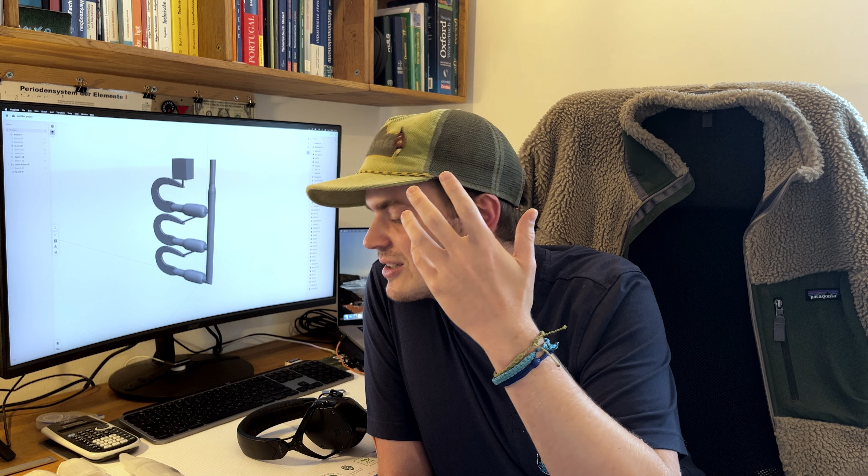It's got very easy functions that you can take into other 3D printing software to make your own molds and then print them straight away.

We're also going to be looking into the flow of the mold itself, because I noticed I made a bit of a mistake in today's video, but I'll go into that in next week's video once we've cast it and demolded it, since we're making a 2-colored trout grub, and I want to see how the flow is in the mold using 2 colors. I'll show you that in the upcoming video. So I'll head over into the 3D printing and modeling software now and show you guys how we made this.

I'll show you guys the mold beforehand, and also a finished version and a finished cast lure at the end of the video, because I'm already ahead of time and actually cast it already, and it's quite cool. There are still some things I have to change in the mold itself, but we'll go into detail on that in the future.

I'll also go into detail on why we're doing a 3D modeling video today instead of continuing with the 3D printed swim and glide bait, because I'm actually running into trouble. But I'll go into detail in the outro.

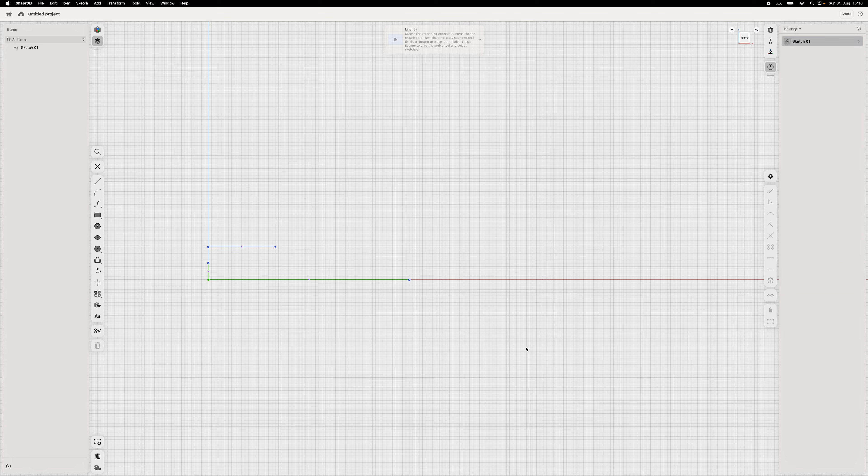So we'll draw this out, and we're going to be around 60 millimeters, and we'll also be around 5 millimeters because we're going to revolve the actual drawing. So we know we'll stick around 5 with the height, and we'll see that at about 20 millimeters the hook actually comes out. These lines just help you orientate on how big the drawing should actually be.

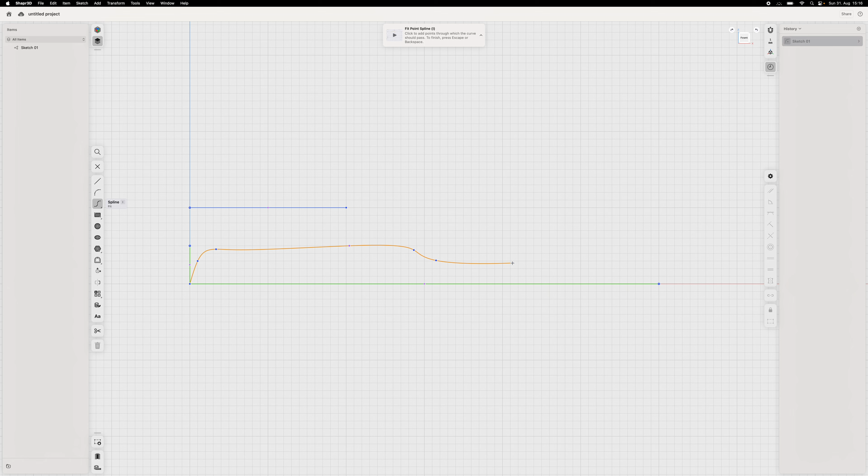The first thing we're going to do is start with a spline drawing, and we'll go along about to here. Then we'll draw in our sketch, go down and just place it about here. Now we can actually take these points and place them a little bit in a way we would like.

So I'm going to delete this one. We'll drag this one out and round it. Then we can take it back a little bit like that, and we'll also drag this one back a bit, so we make a little tail.

A bit further back around here, and we'll place it like that, and we'll also not round it as much so that we've got a bit of a decrease of the volume towards the tail.

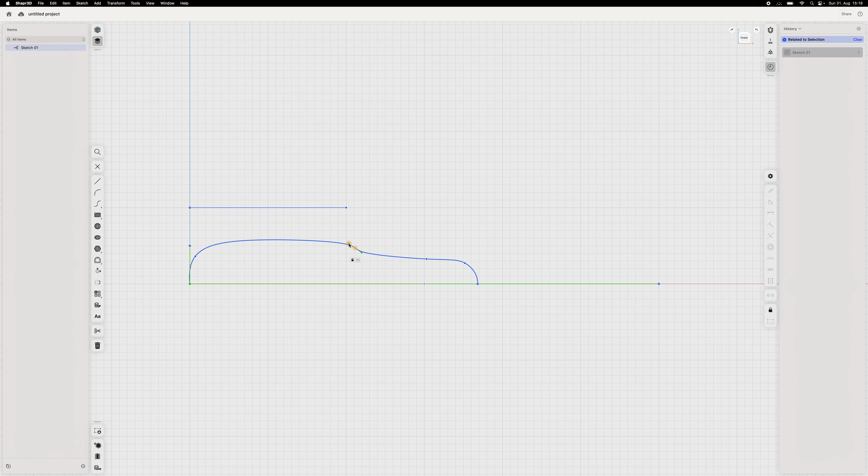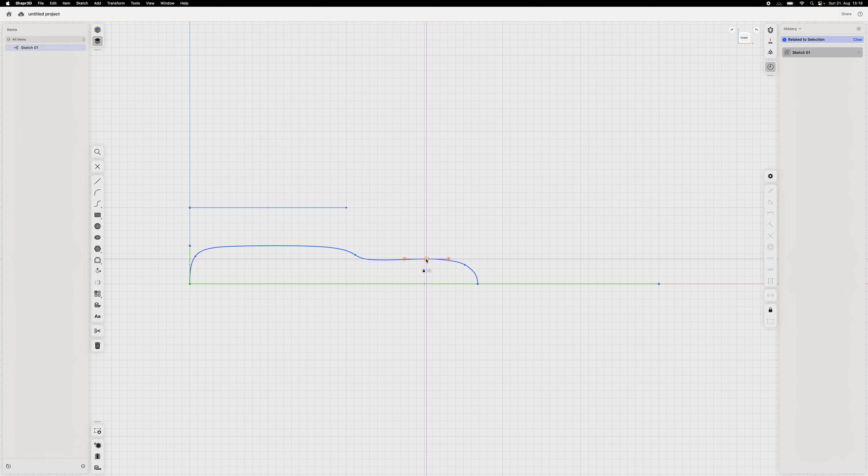So I'll actually delete this point still, and this one we'll go ahead and drag out like that and also pull it down, and then we can also drag this one down. Now we see where we are with the height of the lure, or of the soft plastic, and we can go ahead and drag these a bit further down, and then this should be pretty much ready for creating our first part.

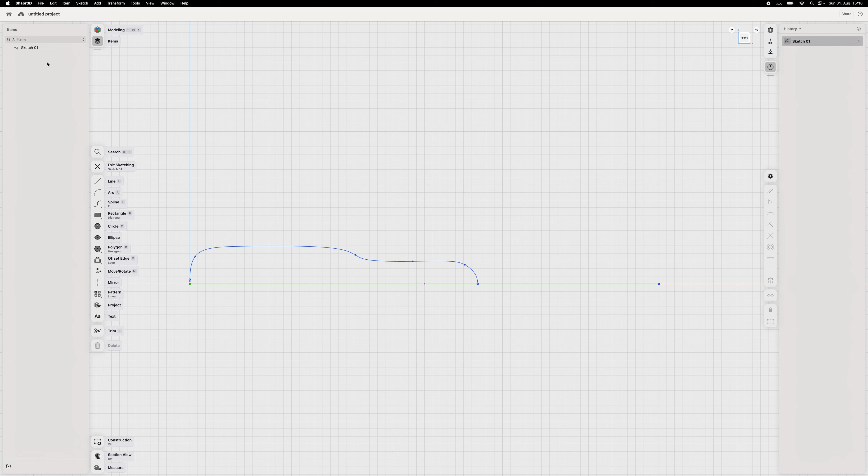So now we will go ahead, staying in that sketch, and we'll trim away our helping lines since we won't be using those two anymore. Let's just check this point is still centered - yes.

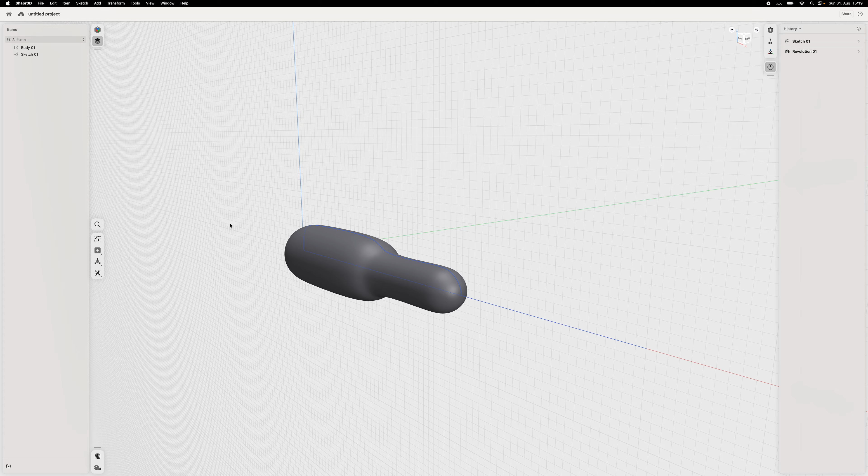Now we go out, choose this sketch and revolve it around this axis. That is going to be the first body part of our lure. We see that that is actually looking quite nice.

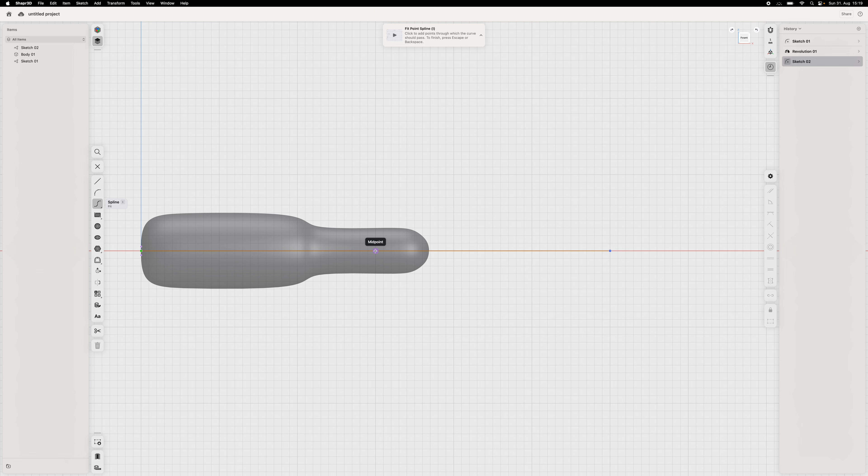Now we can go back and make a new sketch in the same plane we were in before. We'll again add a helping line just to know how long our tail will actually be, sticking with our 60 that we were planning, and we can now use our spline function with the midpoint.

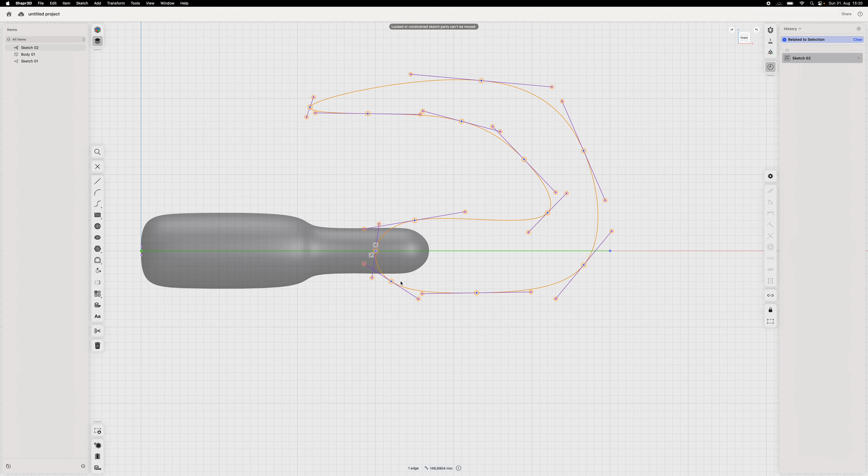We'll draw out a nice little curve, come back right here, and end up right there. Now we can drag these points again towards where we want them to be. I'll make these two quite symmetrical so we have a nice tail right there, then drag this back in a bit and start forming things.

We're trying to make what we think would look good and work well - a little broader right here, but I'm actually quite happy with that. We'll now broaden the top and maybe push it back a little bit, just like that. Once this is done, I think I am quite happy with how that looks now.

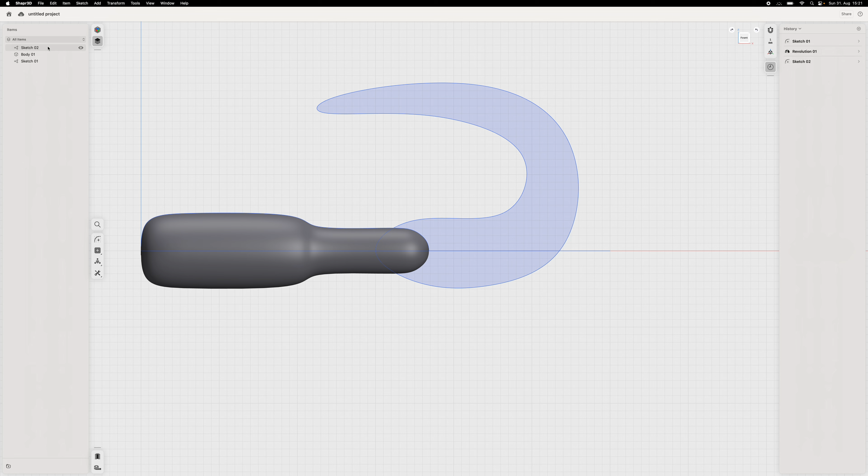So you can go out and see there's these two halves, which you don't want. We'll go back in the sketch, see this is where our 60 is actually, so maybe we'll still go back a bit and drag out the tail a bit, because it doesn't matter too much.

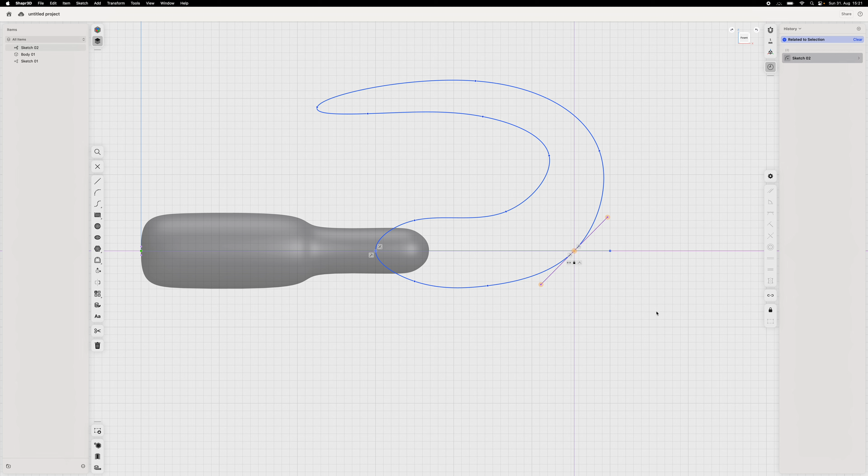We just want it to be nice and floppy, so we'll drag him out about like that. Then we can also minimize the height, because I'm limited with my printer to the size of the mold I can print, since I'm using the A1 mini, so you always have to keep that in mind a little bit. Now I'm quite happy with that.

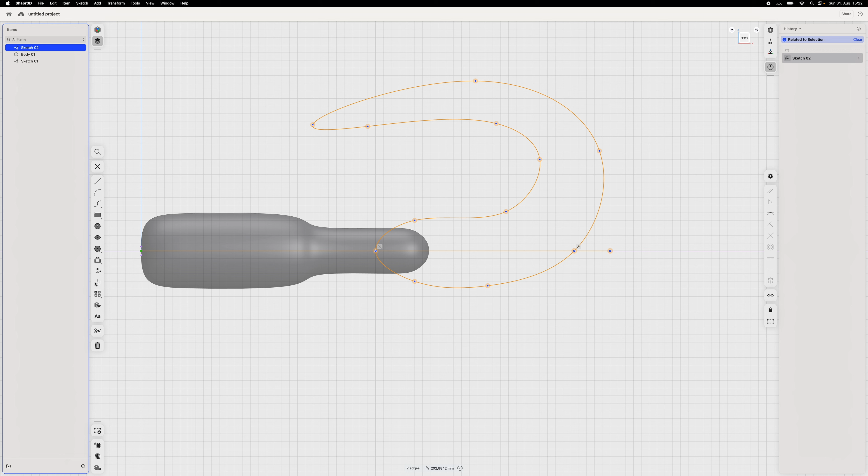We will go out, and as I said, these two we are going to look at now. So we'll go into our sketch, and we forgot to trim away our helping line. Once you trim away our helping line, you can go out and you see it will be the entire body.

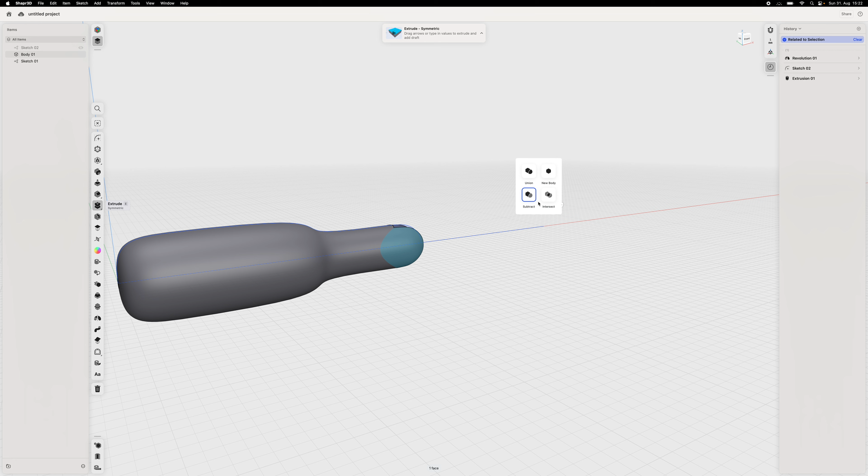Now we can choose the symmetrical extrusion setting, and we will pull him out to 1 millimeter, so our tail will be 2 millimeters thick. We'll say we'd like to have it in union with the body. Now we have got our finished tail for our trout grub, and we can go ahead and add a fillet to round off the corners a little bit.

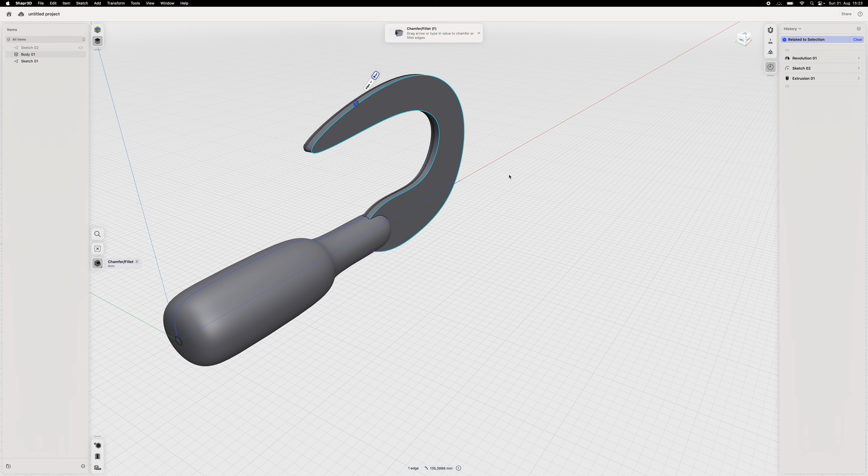It often gives you a little bit of trouble trying to do that. As we see here, we can go to 0.8, and here we are having trouble, so we will try and find a value. This is always different - I don't know exactly what it hangs together with, but we will just choose one that works because it isn't too important.

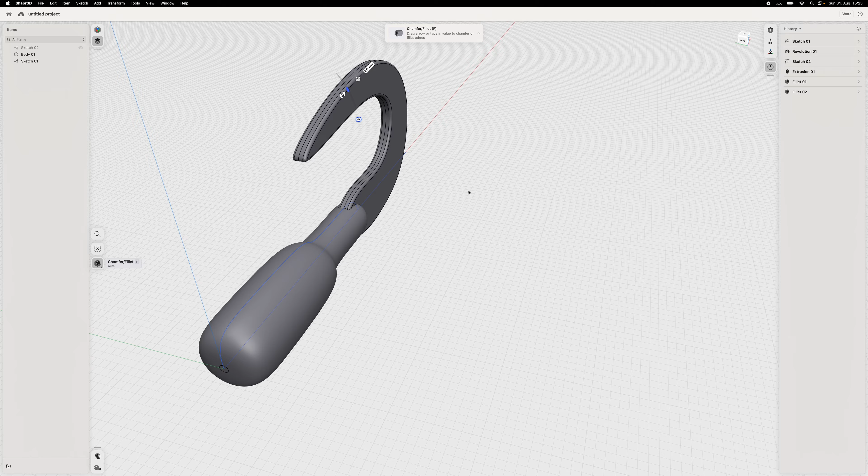It will help us if we have the same on both sides, so we'll go with 0.4 for this one, and here as well. You won't really see this once you do the 3D print because it is really so small - it just helps with the casting.

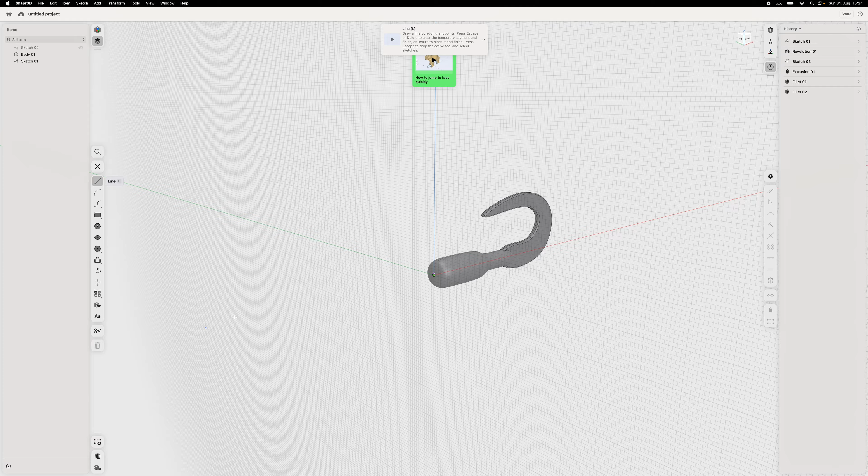So now we have got our bait, which is cool - that is pretty much done. The next thing we're going to be doing is start a new sketch right about here, because we can straight away plan where we will be casting into.

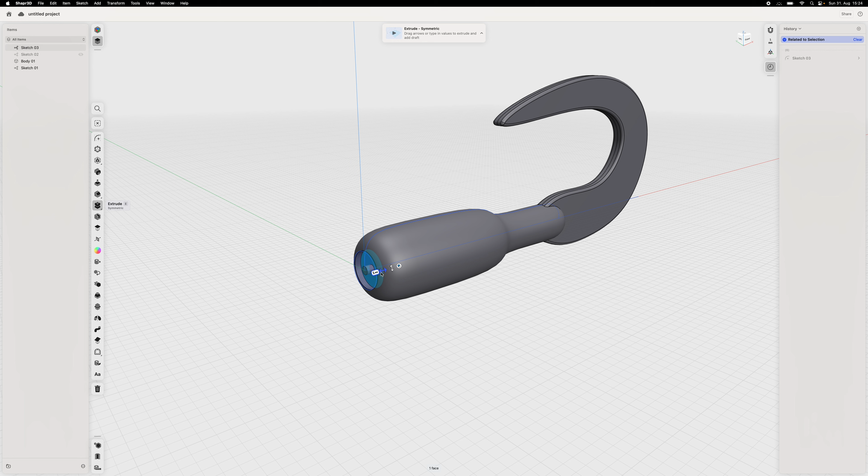So we will make a 5mm inlet for our extrude symmetrically, and we see that that is actually not ideal.

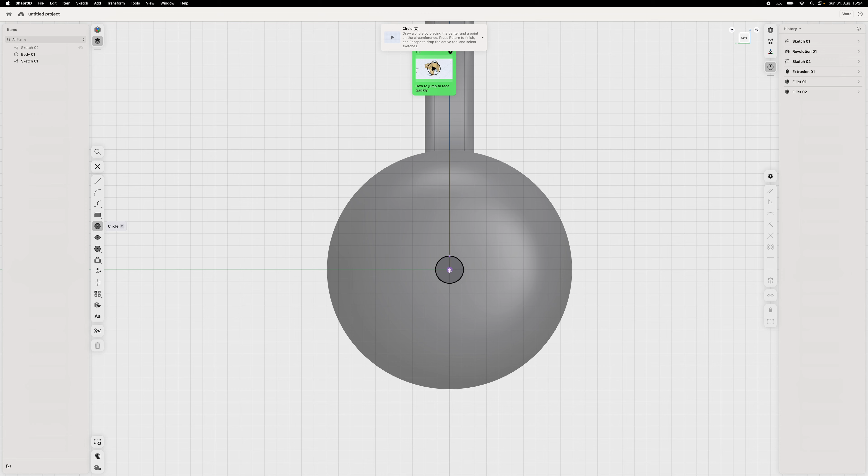So we will actually choose this for our sketching. That is when there is a little bit standing further out than the plane itself, and then you should just choose the side that you have. Through making a symmetric extrusion, we will anyway be looking at the entire surface.

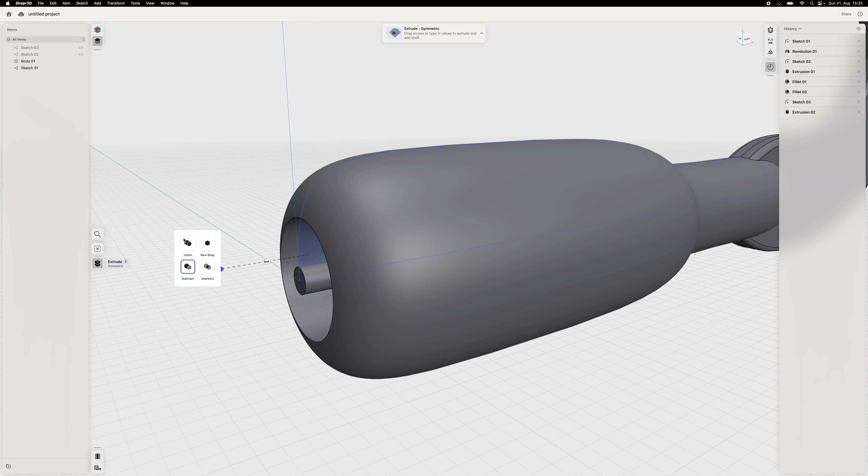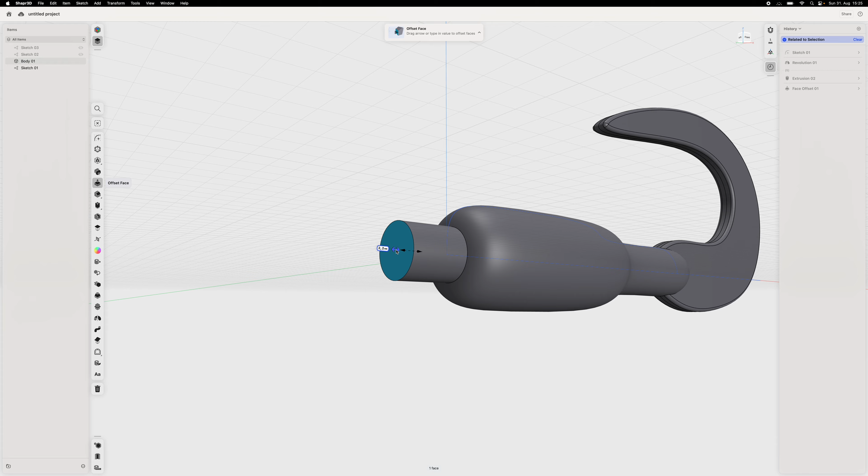It still is the same, but we'll do a different trick. So we will do about 3mm, because we are going to try and keep it as close together as possible. Now we will still choose union, and that's going to be done. Now we will still go ahead and pull out this till it meets up with the surface here. So now we have got the surface. We'll still pull it out maybe another millimeter, or actually 2, just like that. Then we have got a nice channel where we can extrude a casting channel into, but I'll show that in the next step.

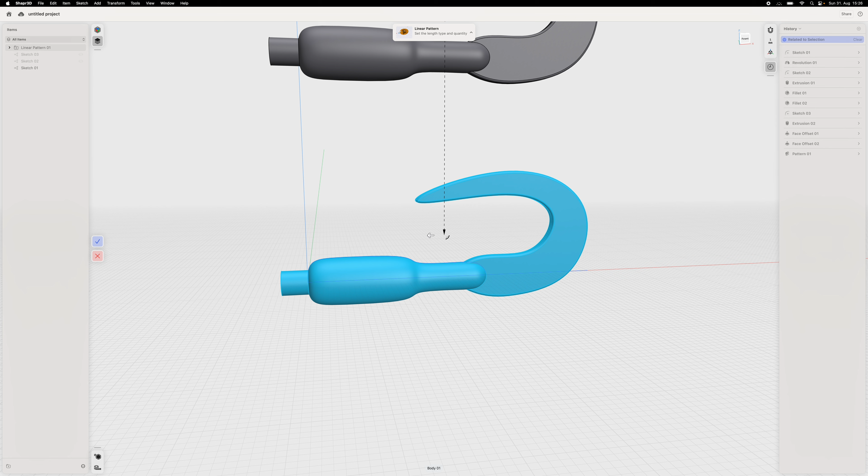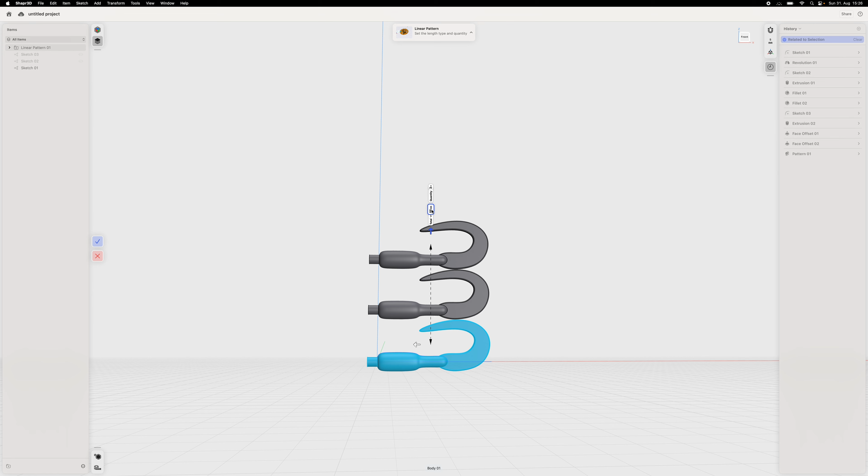Now we will go ahead and choose our body, and we would like to make a pattern in this direction, and we'll see how far apart we have to go. So we can now say 70. Okay, it's still possible to go a bit nearer together. We'll go 60. 60 is quite close. We'll see if we can do 55 without them touching. So no, that doesn't go. So we'll do 57. And that is gonna be what we are gonna work with now in the next stage.

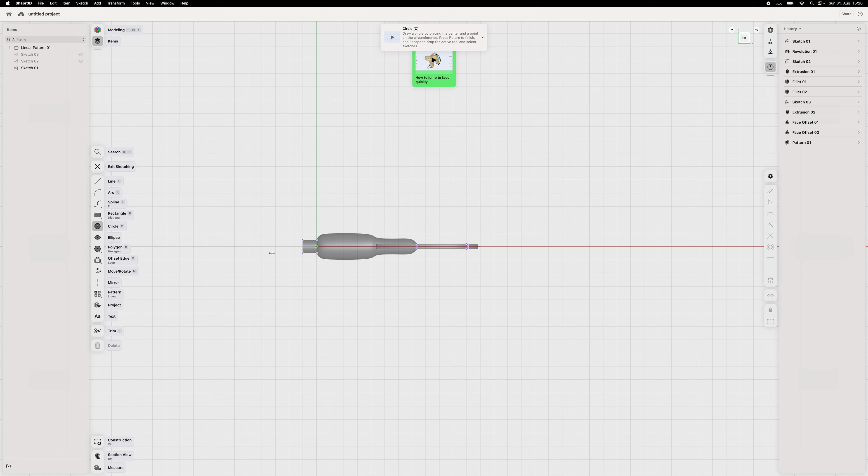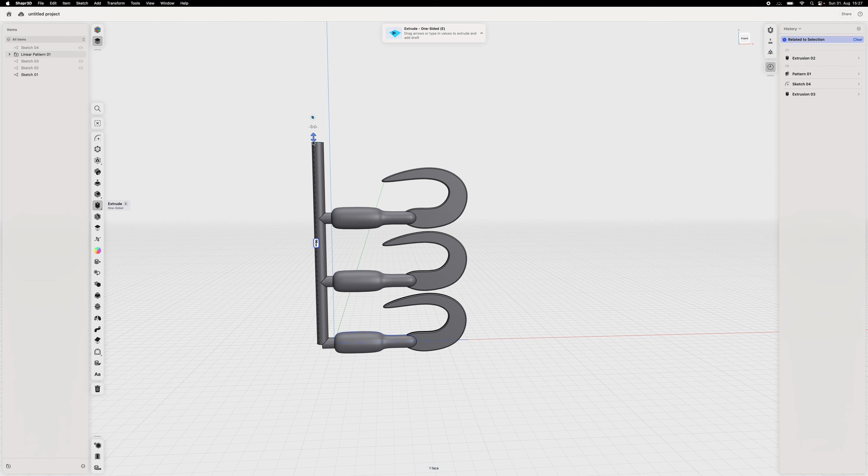So now we have pretty much got our casting channel right here, and we will go into this plane and draw a circle with 5mm right there, which we can extrude up. We will again choose union, and we will try and see that we are about, let's say, I think 90 will be okay for that. So now we will make sure that we also extrude it down. Just like that. And we have got our casting channel where we can place our injection and press in the silicone mix that we will be using for casting.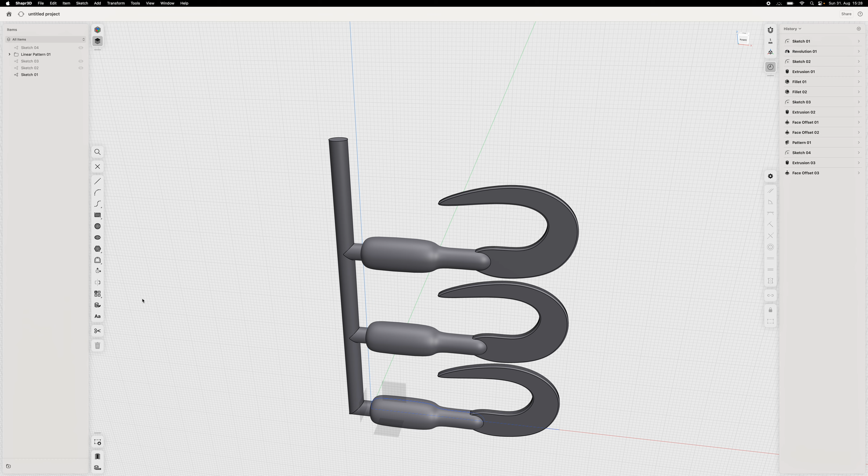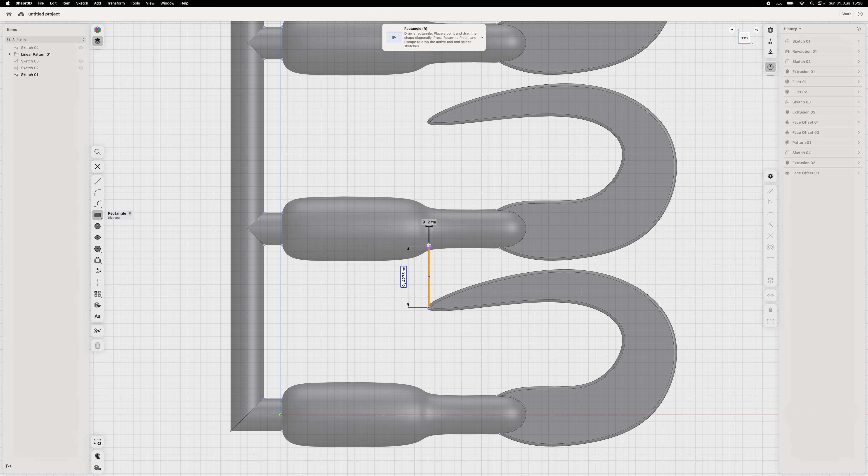Now we will still have to look and find out how we can create an air outlet for any air that is in our mold when we are casting it. So that's the next thing we are going to look at, and we will do that in this plane. So that is exactly in the middle of our mold itself, and we will now draw very easy air outlets right at the tip here, and we will go up to our top body and connect that. We will do exactly the same right here.

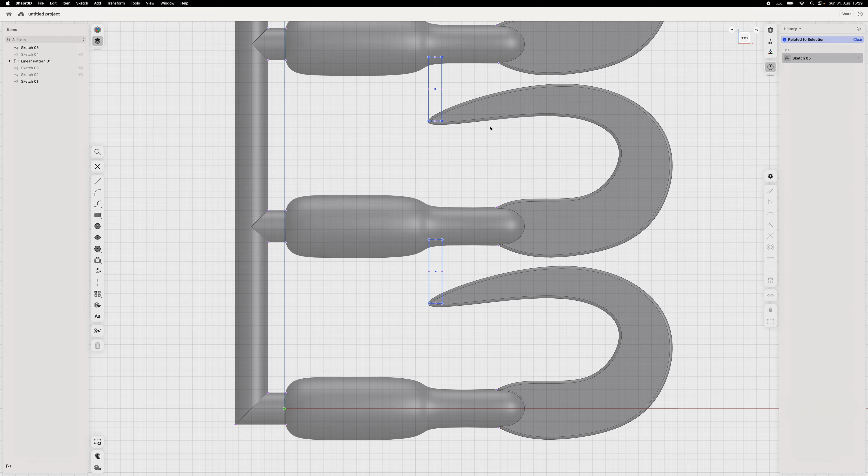We will make them about the same size. So that is going to be those vents. That means that when the material runs in here, the air gets pushed out.

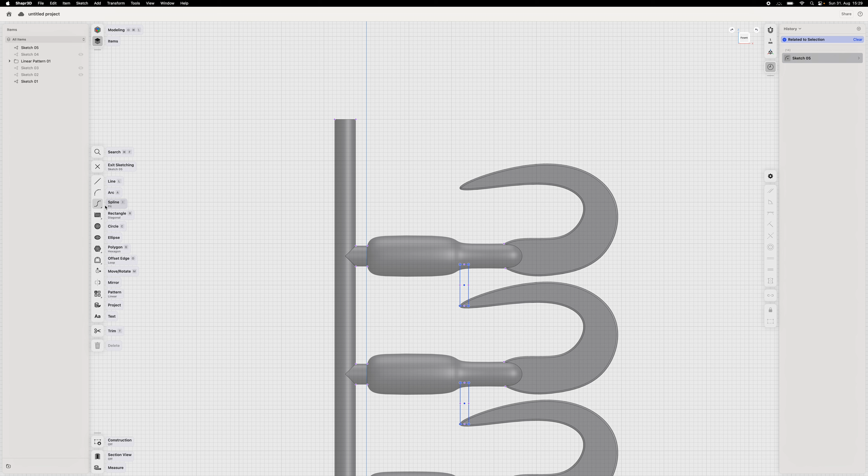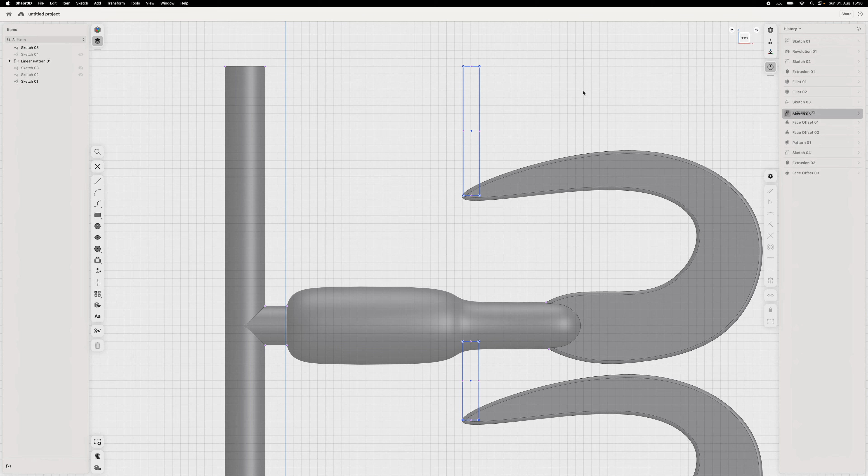We'll see if it's going to be a problem with the bottom one. We'll be casting very slowly, so I'm actually hoping that the bottom form fills first, and we push out the air through this tail out into the second one, and then fill up the second one, push out the air through into the third one, and then we will make one air chamber still at the top here that we will place exactly the same as the other ones right about here, and we will then go up to where we started. So we will also make it 2 millimeters, and we will place it right here, and we will heighten this to here. So that's going to be our air outlet.

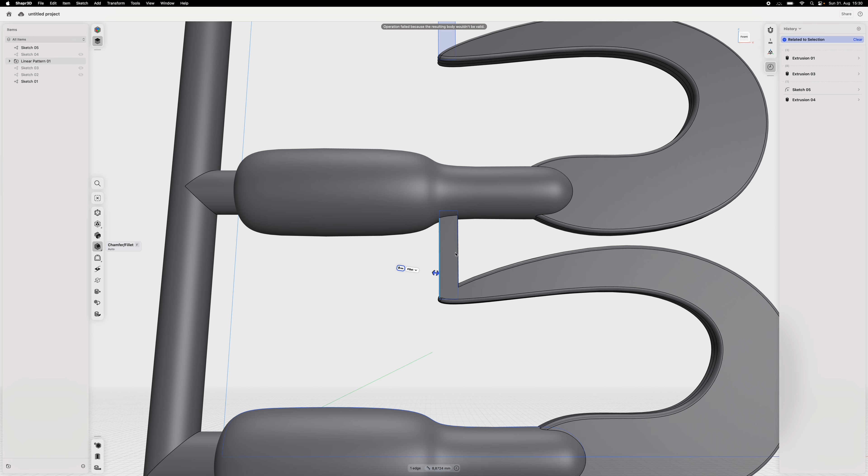Now we have drawn them, so we can go ahead and extrude them once again symmetrically, and we will do them in the same thickness as our tail, and we will choose union. So now we have got that, and we can again use the fillet and make it -- that did work the last time. Funny, doesn't work this time. So we'll just leave it at that and see how they work.

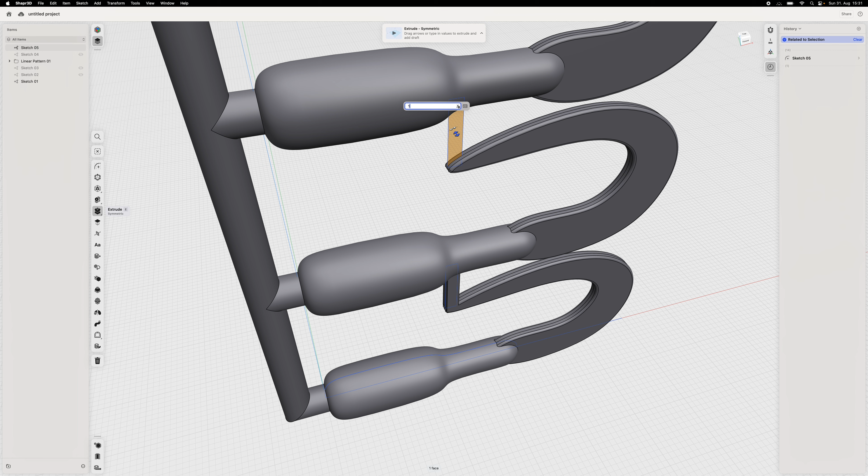We'll clean up the tails anyway, it won't matter too much. I don't want to drag this out too long, because we are actually just seeing how long it would take to make a functional mold, and I don't really think that we will see too much of that.

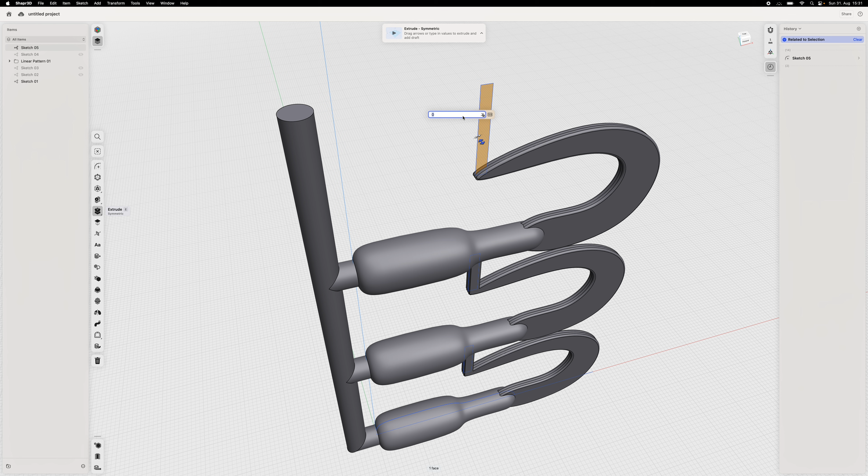So we will again do union, and then we'll go ahead and do the same right here, and we will end up doing it again. Wait, I have to do symmetric, and then we will go ahead and do 1 millimeter and also make one body out of the entire thing. So now you can see that the mold itself will look like this. You will have to part the separate sections right there, but we won't really mind that too much.

Now we are just going to go ahead and make one more sketch, but not in that plane or on that face. We will do it again in the middle, and we will make a chamber where excess material can be caught.

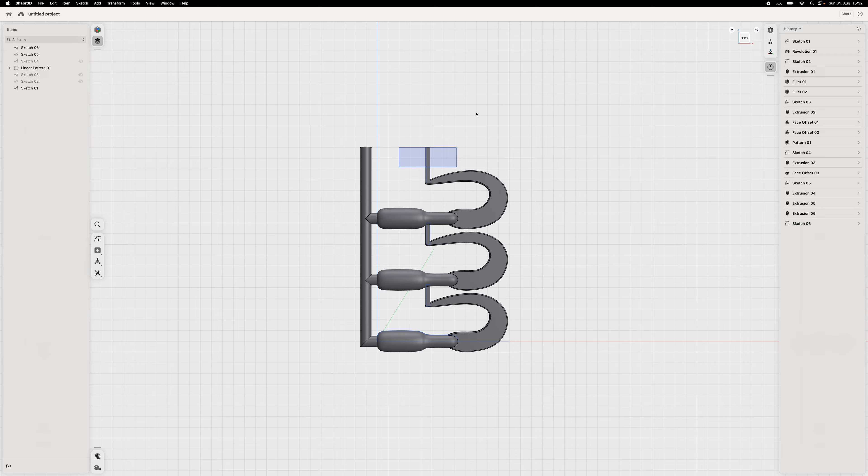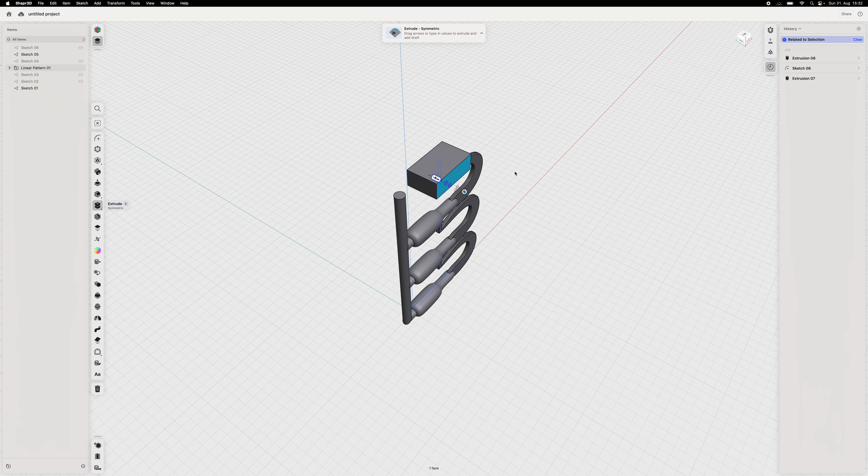So we will make it 9 millimeters long. That means once that is done, we will also do symmetric, and we will union and pull it out to about 8 millimeters. Or maybe a little bit more. No, we'll stick with 8. That's fine. So that's how it looks in the software.

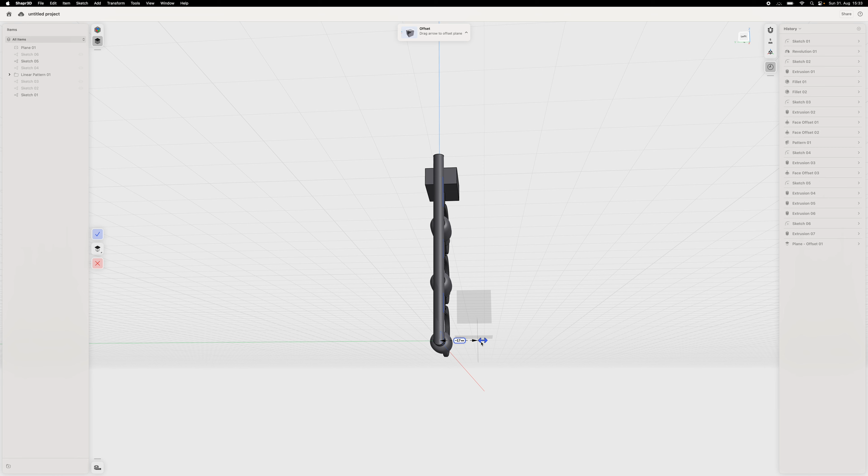Now we can go ahead and add a new construction plane offset to our center, and we will add it at... we'll do 18. Although 18 is actually quite a lot of material, and we'll try and save a bit. So we'll do 16. Now we can go ahead and make our mold.

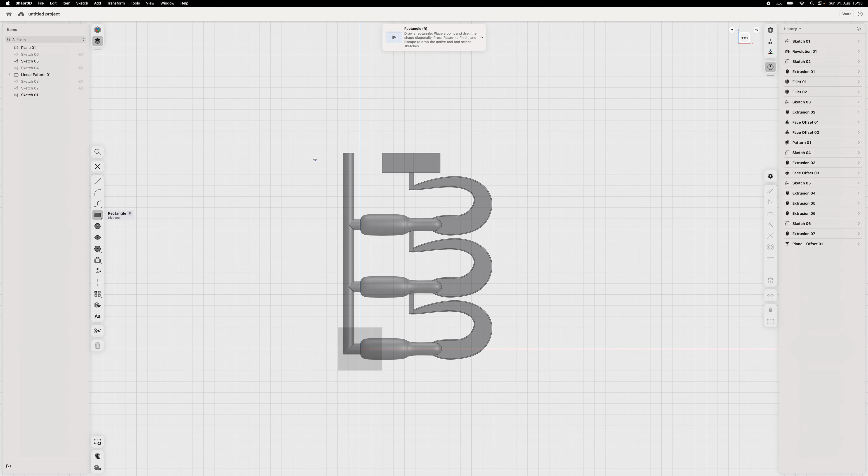So now we will keep in mind that we are going to print it on the A1 Mini, and we have to fit screws in, and we have to fit anything else as well. So I'm not too sure if this will work out on the printer, because 100 is pushing the limits a little bit, but we can still pull this down a little bit and not have as much of an excess material chamber at the top. We'll do that straight away, not that high, and we'll leave it at that.

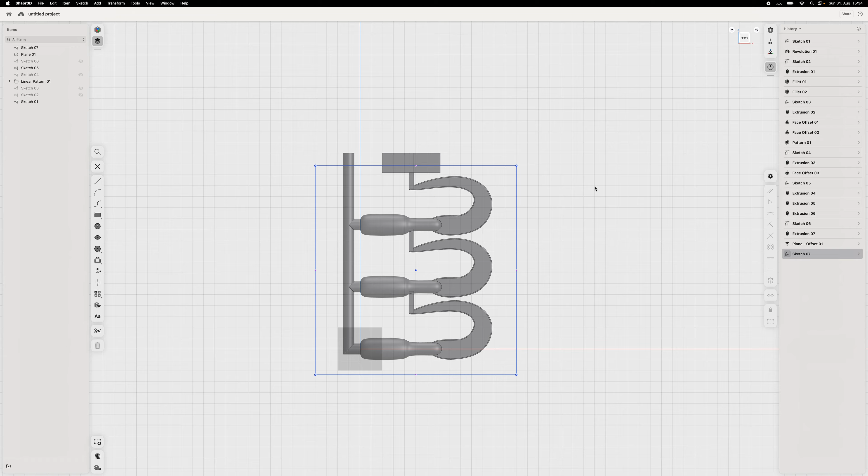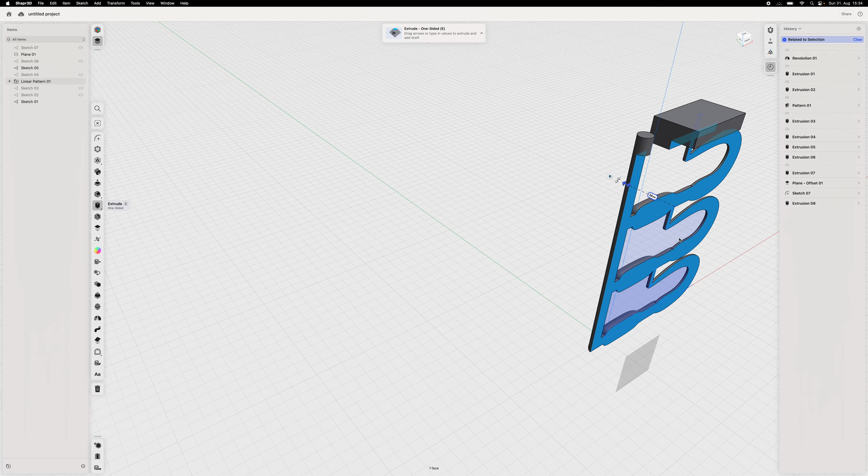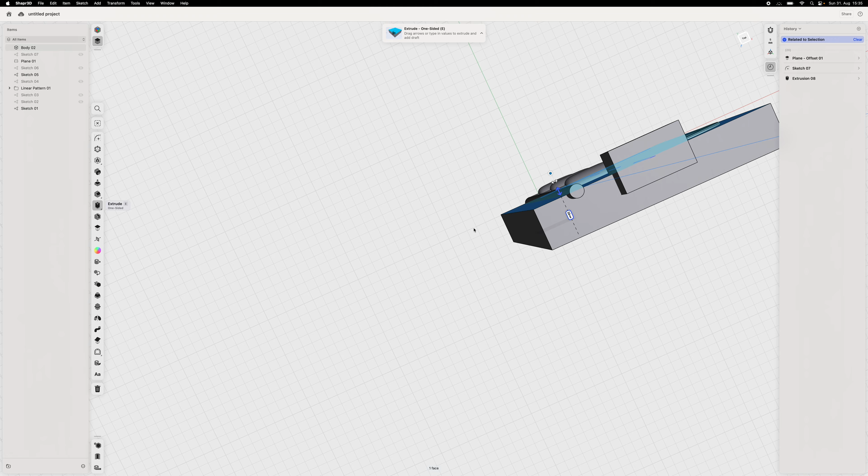And now we'll go ahead and extrude this into the middle of our body. So we'll check that that is in, and we now know that we have got our extrusion the right size. We will do new body, and like this we can check we are in by the 16 millimeters as we extruded on the other side.

And now we can go ahead and do that, and now we are actually ready for the exciting part. I always enjoy it pretty much most. We will go to tools, and we will have to exit this first.

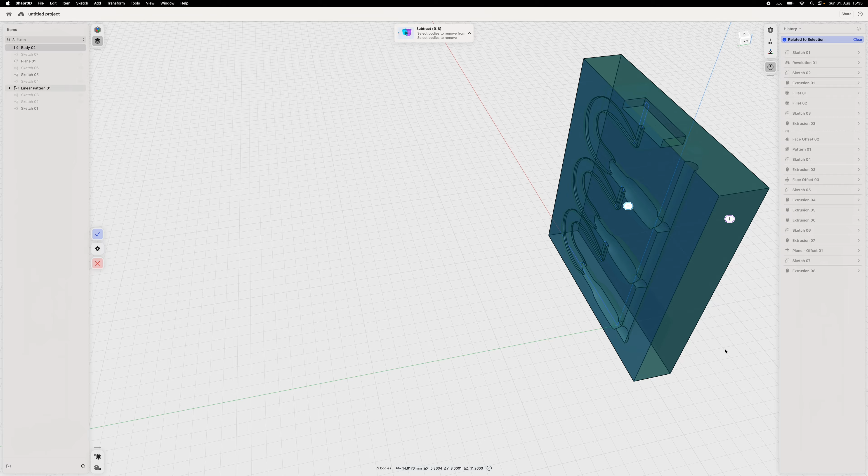We will go to tools, and we will click on subtract, and we will subtract our soft plastics from the mold itself. So as you see, that is what we are working with, and that didn't work. Why didn't that work? Subtract. Done. So now we see that this is what we are working with.

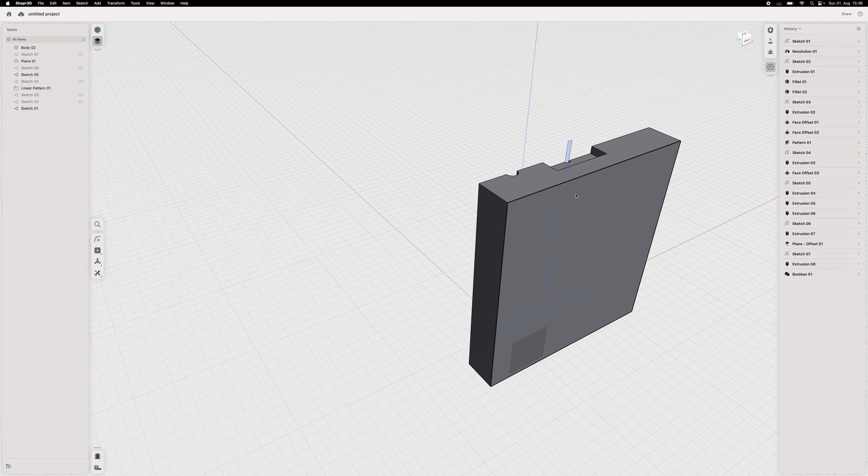We can even go back a little bit with our mold, so we don't use too much of the material itself, and I am quite happy with how that looks.

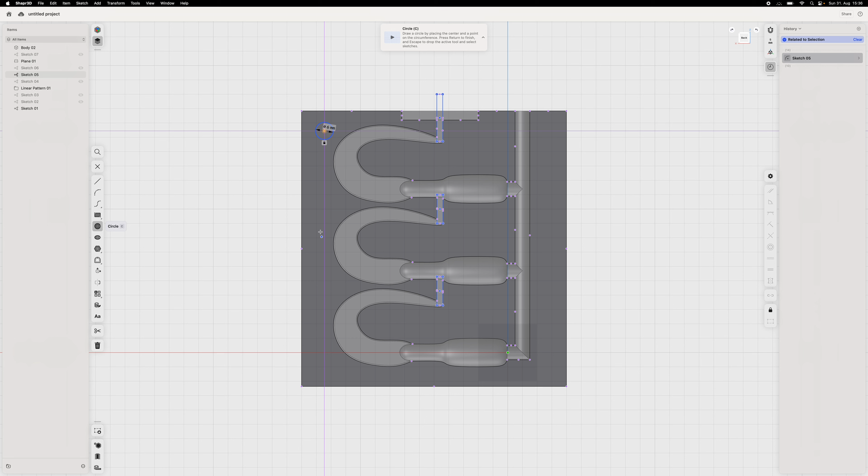So now we can go ahead and sketch out some holes for our screws. We will place them along here, and we will try to— it's always a game of how to place them best, because we always have a little bit of a problem with space.

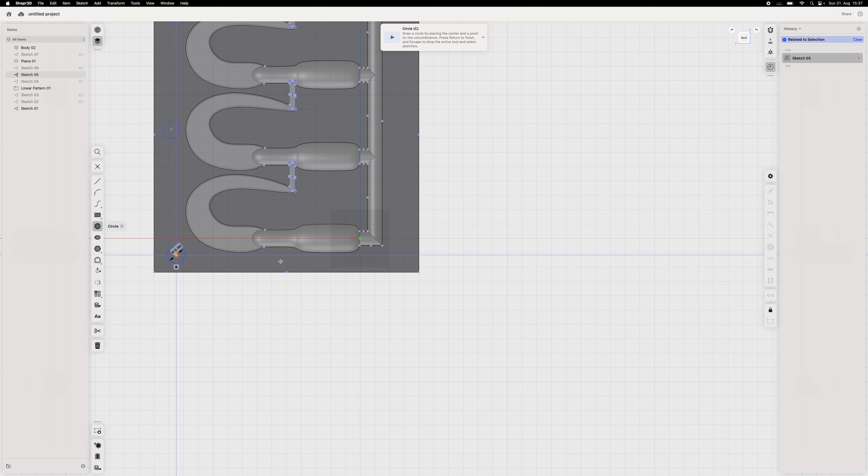But we'll just try our best. That is quite thin, so we'll push it in here. We won't really mind too much that they are symmetrical or anything. We'll just try and place them so that we can print them well. So I am not too worried on how they lay out.

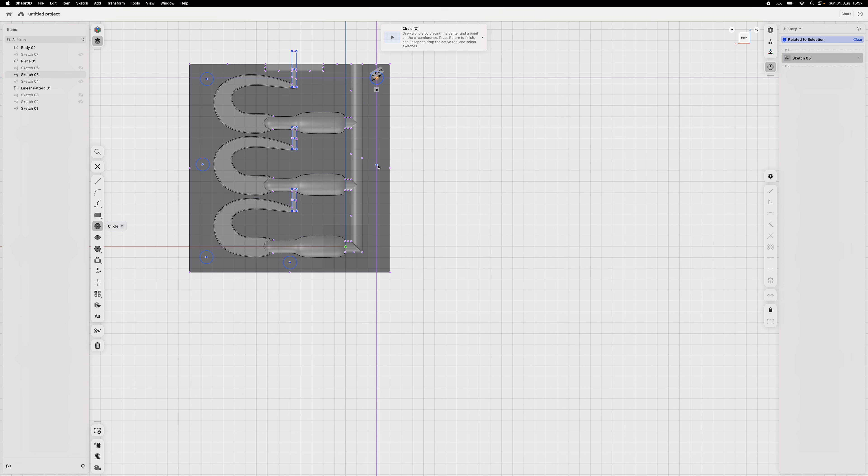We're just trying to optimize so that we can actually maybe even print two at the same time, which would be great. Otherwise we will have to do one after the other, which just means more time in the printer and less time casting them. So we will just go through and make our holes.

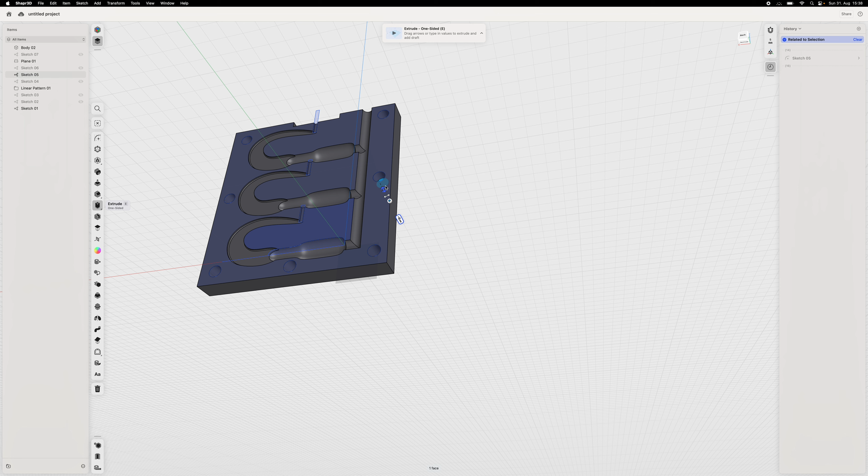Then I can export this file and you guys can see the print settings I'm using, and then we will cast them in next week's video because I don't want to drag it out too long, and we'll see how they work. I might even take them out and test them.

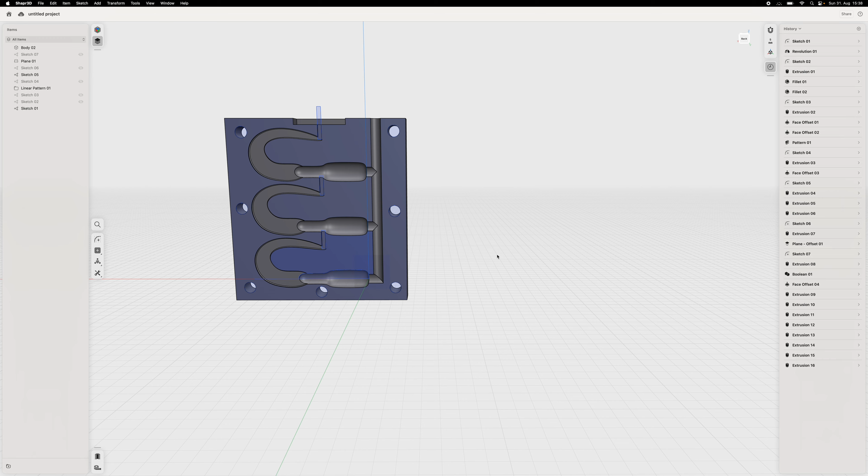So now I will just go ahead—there we go, now we've got them all through. So now I'll just go ahead, export this, put it into the printing software itself, and then we'll go through the printing settings that I will be using.

Now I'll just go through the print settings with you guys. The print itself takes 6 hours or a bit more, I checked. But we'll anyway see that still.

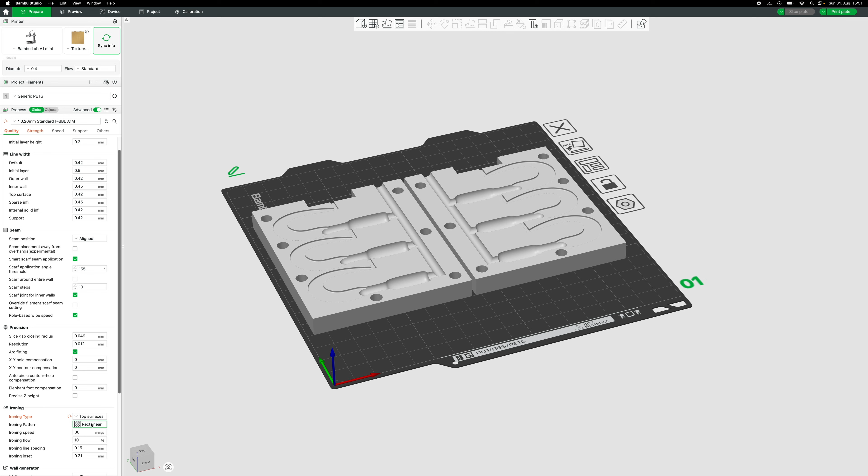I will show you why I use them, because I will now go to the prepared mold itself. If you look, we will still have some print lines. They won't be completely gone in the rounded edges.

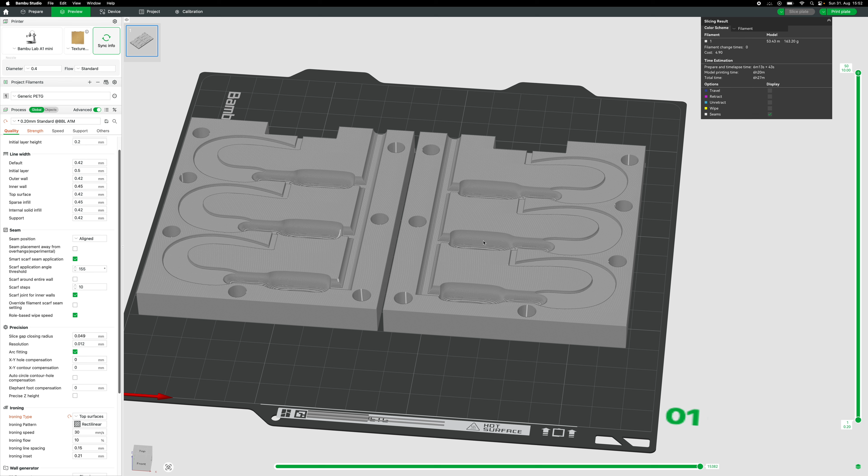You can still go into other settings that round that off even more, but I don't want to go into that, and I'll show you in another video how you can maybe make these curves a little bit rounder. We won't worry too much for this bait itself though. It gives it a little bit of texture, and I actually like how it looks right now.

So the tail itself will be quite flat through the ironing settings that we have chosen. All flat surfaces work very well.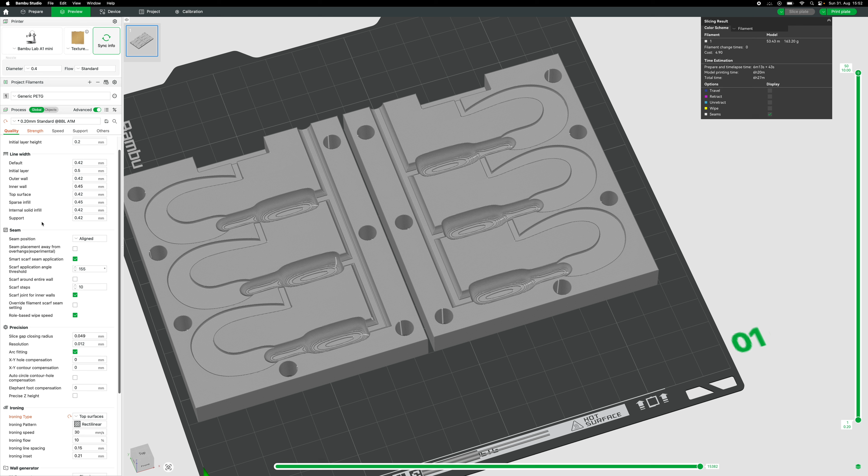Now I'll just show you guys what happens if you go into concentric ironing. If you go into that setting, you'll see that you end up with more unclean surfaces along here, because you have a different pattern. So you'll have unclean surfaces right here in your tail.

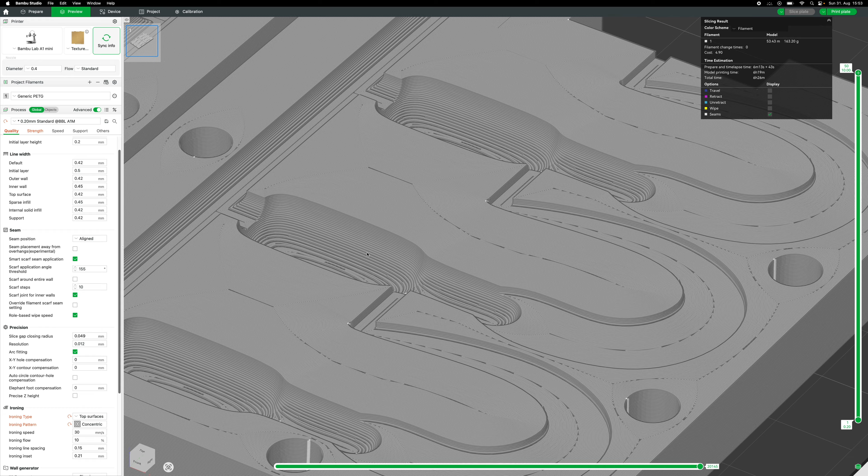Also inside of your bait, you see that there are some lines, and it doesn't look as clean as if we do it with rectilinear. I'll show you once again that you can compare. If you look at this, this will be a lot cleaner look for the lure itself and for minimal cleanup.

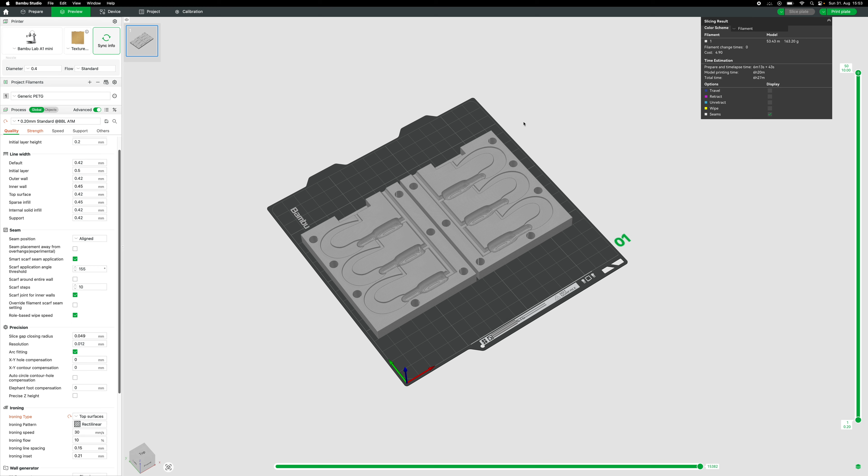Because we'll be just doing minimal cleanup and then we'll be casting, and we'll see how it turns out, so you guys can imagine how your lures would look if you just print it and cast directly into the mold.

As you see, it is quite a big mold, because we are doing a 3-parted one. It is also once again a stackable mold, because you could add more next to each other if you have long enough screws. So you could then always double and triple the output.

And as you see, we are going to be printing for the next 6.5 hours. So I'll start this straight away and then I'll see you guys in the outro. I hope you guys enjoyed it, and we'll see what we are able to cast next week.

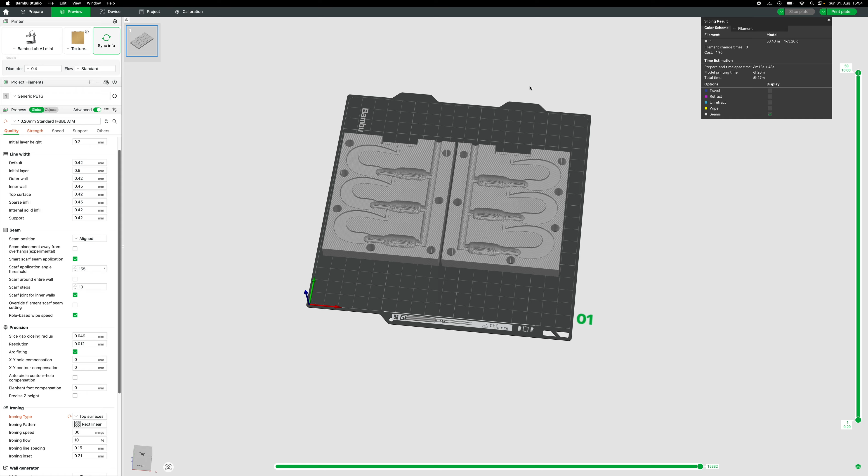As you saw, today's video is going to be a little bit longer because the 3D modeling, with explaining everything that I do and showing you in real time how I actually model it... the drawing part is a bit around 30 minutes, a bit under 30 minutes, but we actually end up with this finished mold. I'm really happy with how it turned out.

I'm also happy with the first cast that I made, which I'll show you in next week's video. And I'll just give you a little sneak peek of the lure we were able to make.

I'll also be going into a real test in the next video and take it out to a small stream. This is just like a classic little trout grub. You can cast quite a lot of them and change up colors, play around with that.

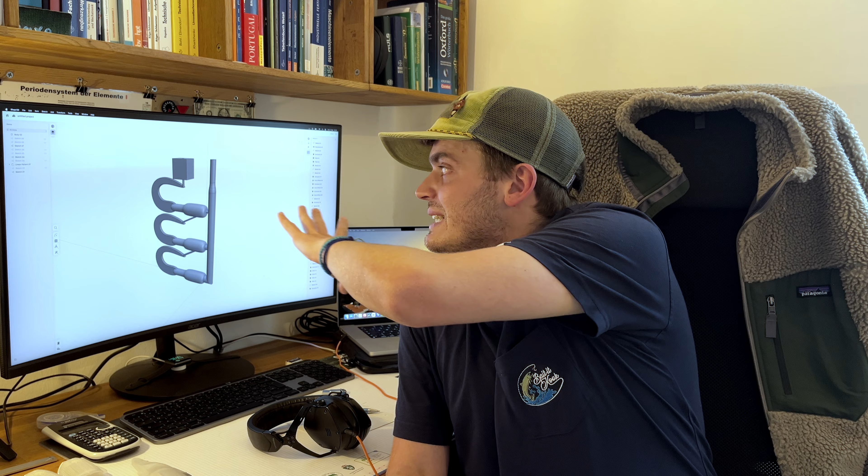We'll also be going into details on what I'm actually going to change. If you look at the screen right now, you can see some things I changed towards the mold already, because straight away after casting this, I went back to my desktop and changed things up a little bit.

Next week's video is going to be the casting video towards the bait, and we'll go out and test it. After that video, we'll look at how it flows through the mold itself, make some changes, print a new mold, and test it again. I'll make just one video for that so I don't drag it out too much like this one. So it's going to be a one-part video going into detail of the changes we made, and then straight away casting and testing the lure.

Now to the part of why I'm actually doing a little bit of a 3D modeling video today and not going into more detail on my swimbait — I just needed a little bit of a break to clear my head for this lure.

I then tested the polyurethane varnish. As I said in the last video, I did a UV coat, and I was looking forward to testing a spray-on clear coat. I followed all the instructions on the product itself — we applied a lot of thin layers, let them dry for 24 hours before reapplying, and waited nearly an entire week before starting the first clear coat on an airbrushed lure.